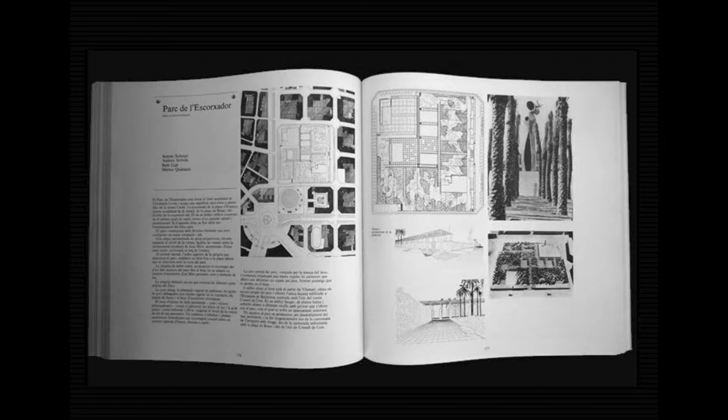And these little plazas were done with few money, and with this strategy, which I think is the most emotional moment that we lived in this urban transformation.

Some of them were simply just opening, taking cars out, opening spaces in front of some monument. Some others were more complicated because it was this both thing at the same time: to rediscover our central old city, and at the same time to connect with the new cities that didn't have any public spaces, and then they were transformed to allow people to gather around.

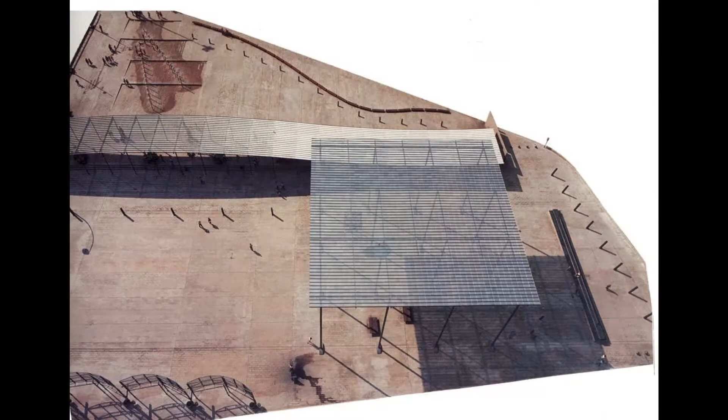Or other more famous spaces that nobody has really used in a proper way, but still there were attempts, very risky attempts, to kind of discover new ways to gather in the public spaces. Or parks, in the places where there were quarries and they didn't exist.

And all these different little strategies became a little bit bigger in a new strategy when we had the Olympic Games. In '86, we decided to, not just by doing little plazas, but taking 4 big spaces that were the 4 areas of the Olympic Games, and then connect them all with a ring road that went all around.

These 4 areas kind of were the excuse: one, to open the city to the sea, another one opened the city to the mountain of Montjuic, and the other 2 opened the city to the mountain of Collserola.

4 dots, very well placed for the Olympic Games, not really for the Olympic Games, because we didn't really care about these 15 days of people jumping, but they were very important to take those 4 areas and to create a whole strategy for the city to transform it as a whole.

The Olympic Village, the Olympic Ring, and the ring road around that connect all those Olympic areas, which mostly went through those areas that were forgotten during the Franco dictatorship, and was an excuse also to connect them all.

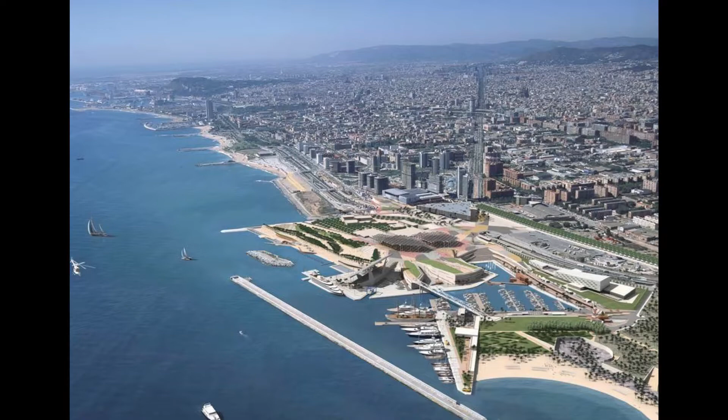You see the amazing transformation that the Forum of Culture brought to the city, but you don't see what we had to do to pay for it. Here it's quite easy to see: you see the public transformation, but at the same time you see a new kind of city created by Hines, an American investor who bought most of the land in front of the sea and created this new town with a shopping mall and houses that had nothing to do with the model of city transformation we'd lived with in the years before.

So you see the logo of the forum, those two hands. It seemed to me those two hands were the private and the public shaking hands, but in fact it was, I would say, a terrible situation, which you can see very easily with those two triangular buildings.

One is public, built by Herzog and de Meuron, supposedly one of the best architects in the world, and supposed to be one of the best buildings in the city. At the same time, another triangular building right in front of it was one of the worst buildings in the world, done by Stern—a terrible shopping mall without windows, without connection to the city, connected by cars, with a highway leading directly to parking spaces, and next to a neighborhood that's almost a gated community with towers built as if it were Singapore, where Hines had built many developments. It's an amazing transformation you can also see in the city's skyline.

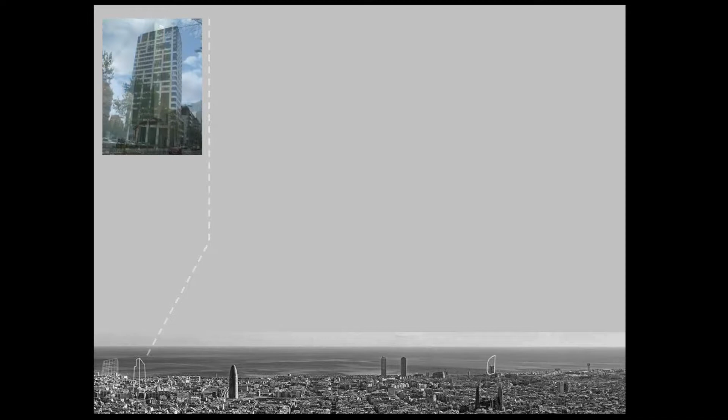It's a skyline, most of it related to the coming of those investments and star architects to our city, and we allowed them to build exceptions in our city. For instance, we see this building by Jean Nouvel, which is quite famous. He came to our city and landed, allowing them to build an urban exception. But it's not only him, it's also Ricardo Bofill, Dominique Perrault, Álvaro Siza, Fuksas, Norman Foster. I would say we have one of the cities with the most star architects landing with those big companies in our city.

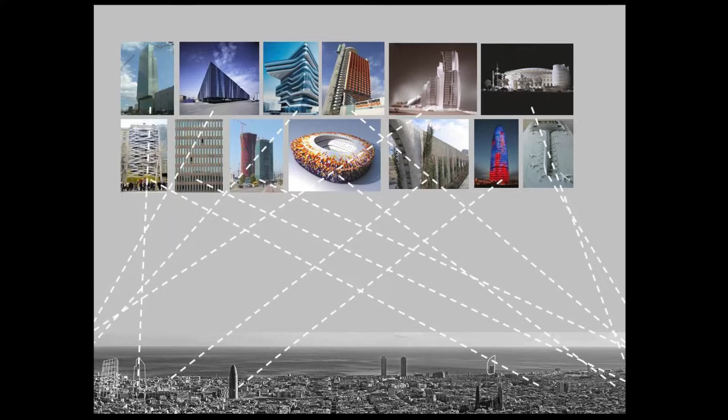It's really a crazy situation, you can feel that our city had somehow been sold. And as you know, they all know that we have Gaudí as one of our most important items to show around the world.

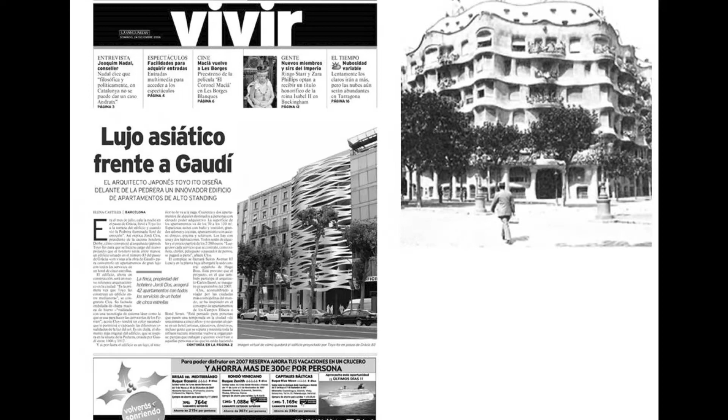They come, like Toyo Ito for instance, thinking that we are kind of stupid, and they create buildings with an excuse of Gaudí. He was saying that this building, which is in front of La Pedrera, is the La Pedrera of the 21st century, but in fact it's a project where he only designed the facade. So again, these masks—we are creating masks in our city, creating this stage for people to come and visit and be enlightened by our architecture, which in fact I would say is not architecture; it's only the dress of an architect.

Or Norman Foster, who came to the project of the new stadium of Football Club Barcelona, and said it was inspired by the dragon of Parc Güell. Or of course Jean Nouvel, who said he was building the tower that is now finishing at the Sagrada Familia, inspired by that.

But an even worse example is Ricardo Bofill, who was imitating a building which has nothing to do with our culture, and of course building in a place which is forbidden—in front of a very popular, magnificent neighborhood, La Barceloneta, that is being gentrified very, very quickly.

So as I was saying, here's Sheldon Adelson, who builds those casinos in Singapore. He wanted to buy part of Barcelona to create a big casino with prostitutes and drug dealers, and fortunately we changed the government and stopped it. But it was about to be built in our city.

So I was saying that we loved the way we started, opening Barcelona to the world and saying hello, but at the same time many people in the city started recognizing that this way of becoming a global city had also its counterpart.

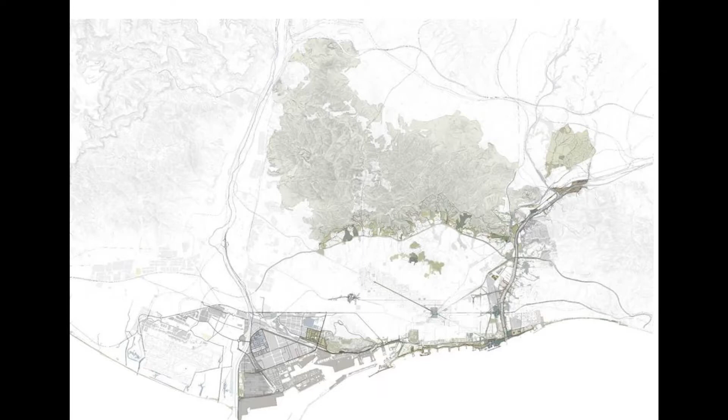The ring road territory is a project that deals with four big projects. One is to rethink our relation with the sea. We built up our beaches because we didn't have beaches. Almost all our seafront is artificial, and that's something we have to rethink about.

Would we do it again the same way, putting sand and fighting against the sea? Probably not. So now it's a great opportunity to rethink a new way the city relates with the sea.

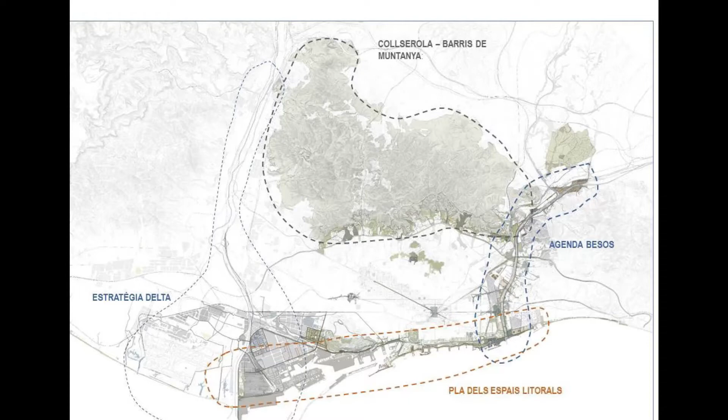Also the new way the city relates with the two rivers we have around. This is Besòs, where most of the poverty of the whole country is concentrated, so it's a great opportunity to do a social project around the river. In the River Llobregat we have a concentration of enormous economic forces, like the airport, the port, the industrial area. So it's a very important project with the axis of the economy.

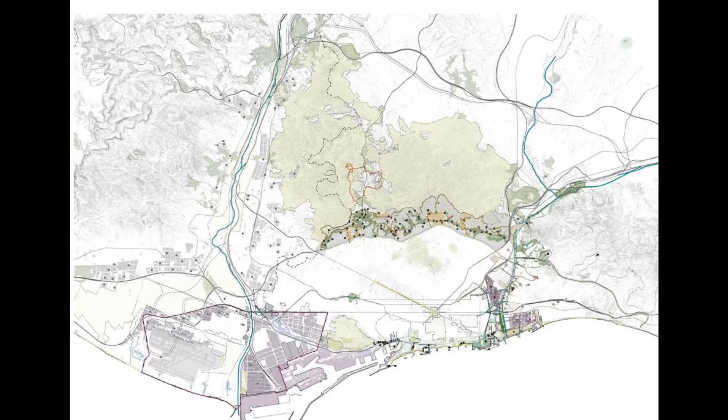And also we have the mountain, the central park of the region, which is also a very important project belonging to environment. So we have the social, the economic, the environmental project, and here in the sea, the most identity-based project, one that has a little bit of everything.

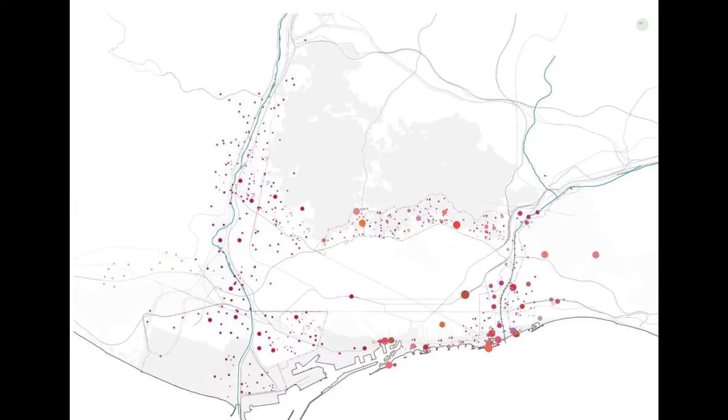These four projects contain like 600 little projects all around, and I'm going to try to explain just some of them very quickly.

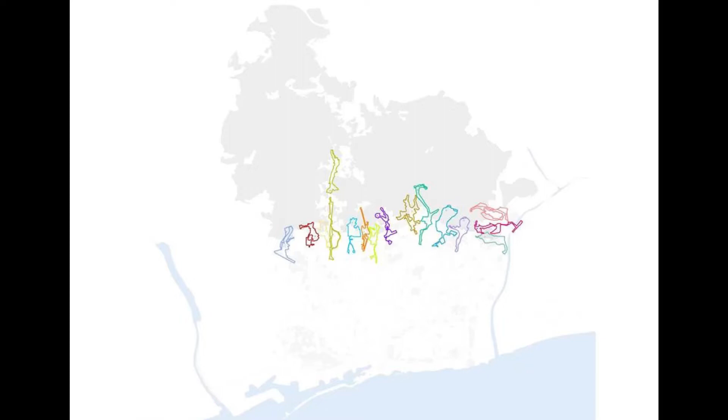One of the big projects we worked on before this government was the possibility to connect with doors—we say doors, but with the mountain. Our idea is not only to connect with the mountain, but also with the sea, creating these green-blue corridors that cross the whole city, a great opportunity to connect those two ecologies.

That's something already being done, connecting the mountain with the sea. But mainly with the project of the seafront, we realize the distance, the density is very short, and it's important to realize that Barcelonians are a strange kind of animal that belongs at the same time to the mountain and to the sea.

Even our gastronomic culture is mar y montaña, sea and mountain, which you find in our dishes. So it's about realizing we belong to both ecologies, and creating those corridors that connect economically, socially, and culturally the whole city.

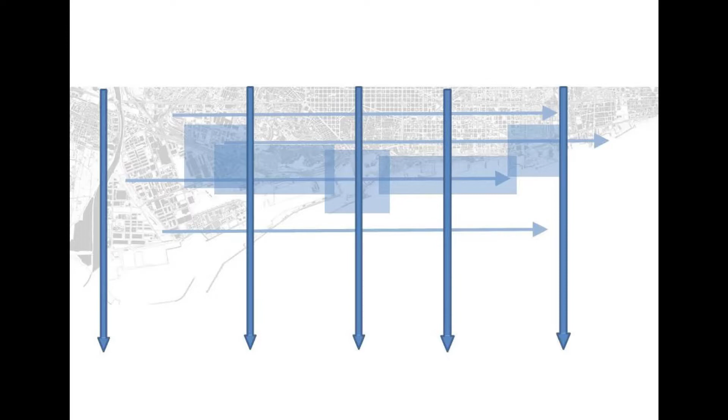But mainly when we hit the seafront, instead of thinking of the seafront the way it's always been thought—creating an urban strategy only related to itself—we want to change it and use it transversely, and create doors to the sea as well.

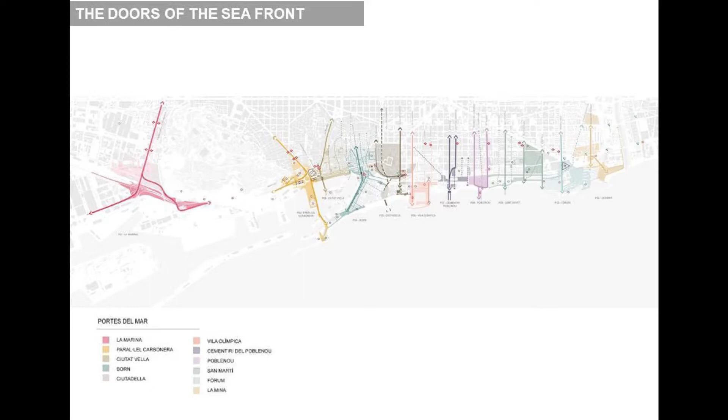We want to connect and really ask the project of the seafront what can be strongly related with the needs of the people behind it. We are not doing beaches for tourism. We are doing beaches for the neighborhoods that are behind.

So the important project we are now dealing with is how to connect very strongly and easily with the neighborhoods that are behind.

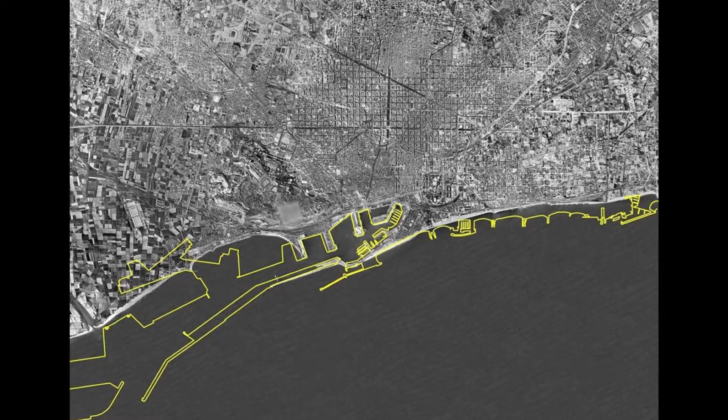And also, how do we deal with the sea? This is the seafront in the 50s, and this is the seafront now. As you see, we invented our seafront, and this is something we cannot do anymore. It's so stupid—every year a storm comes and takes all the sand out of our beaches. Now, with the new strategy of resilience, we have to work with nature instead of against nature. So this is the other big thing about the project.

And mainly one of the main issues is talking about those dimensions of maritimity. Barcelona has done many things on the seafront during the last years, but few of them are really related with the sea.

We are putting shopping malls, five-star hotels, casinos, bars and restaurants, but we are not really talking about the blue economy and the cultural, spatial, social, and economic forces that the sea has to really inform the city as a whole.

So we really have maritimity, but just formally. We have a shrimp on top of a pergola, a fish on top of a casino, a five-star hotel shaped like a sail, a boat which is a restaurant, and waves which are a shopping mall. But none of them are related to the sea.

So we have to change this culture, not only formally, not only doing forms that relate to the sea, but content—really content related with it.

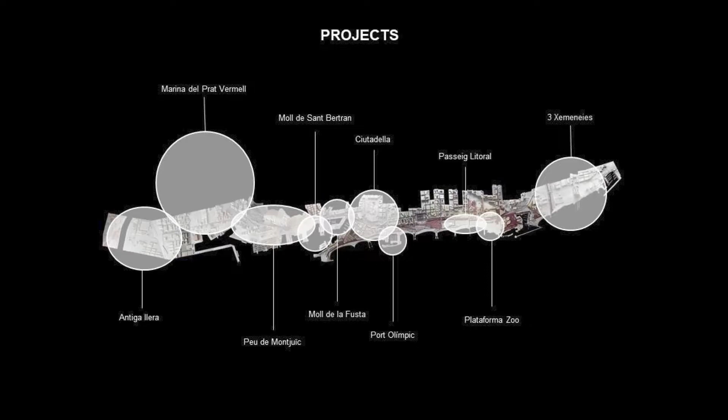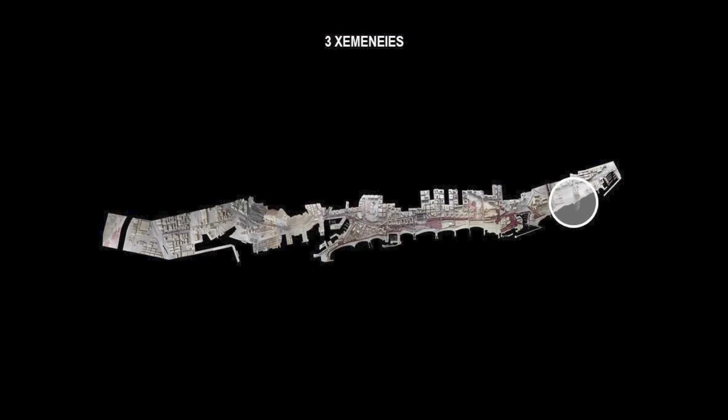One is these 2 kilometers in the seafront that we have to think about—if we want beaches, if we want a malecon, a neighborhood, or a shopping mall. So we have this amazing opportunity of these 2 kilometers, but also this factory, this power plant that has been empty, and now we are thinking which kind of programs we could give it.

But at the same time, something very important is that we have a river here, and the mouth of the river is canalized now, like if it was a sewage. So it's a great opportunity now for us to open up the river and create this new landscape.

Here we have Joanna, a part of our team and the director of the team that has been dealing with all these landscape projects. She's Greek, but she lives in Barcelona and works in Barcelona Regional. She could explain it much better than I will.

But definitely, one great opportunity is to redefine this line, this coastline, with this great opportunity of a new area and a new mouth of a river.

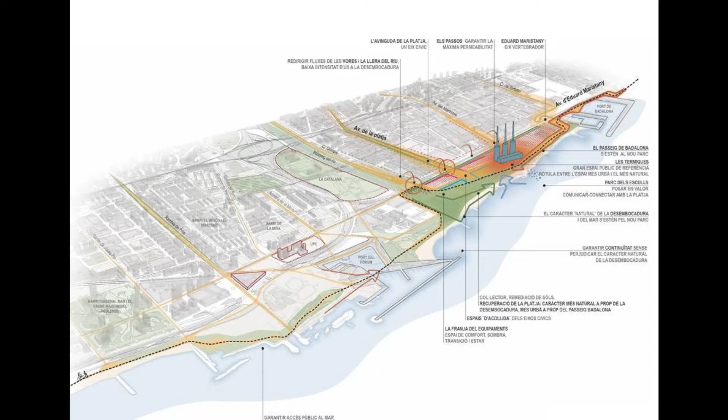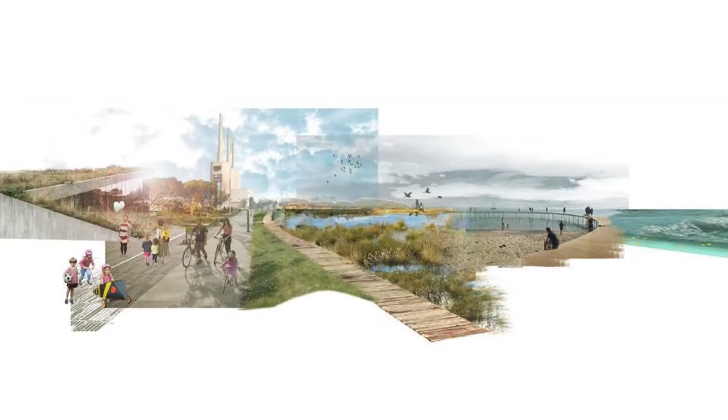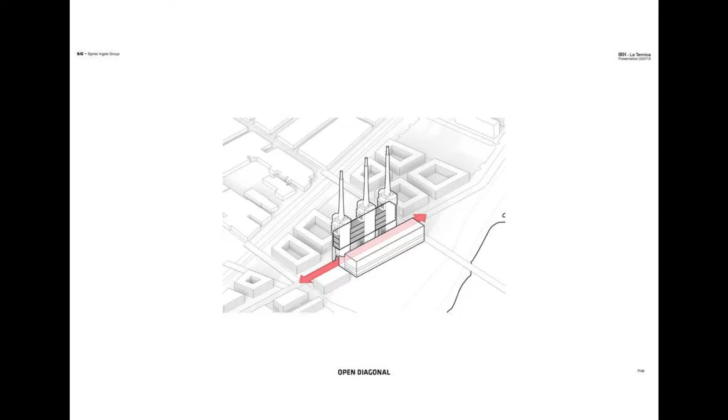As I say, creating also not only new landscapes for the city and for the river, but also to defend or deal with the great struggles we have with storms and water that definitely will rise—not only because sea level will rise 1.5 meters in 50 years, but also because of storms that we calculate will be more than 5 or 6 meters and will affect all these areas. So we have to laminate the water that hits the ground.

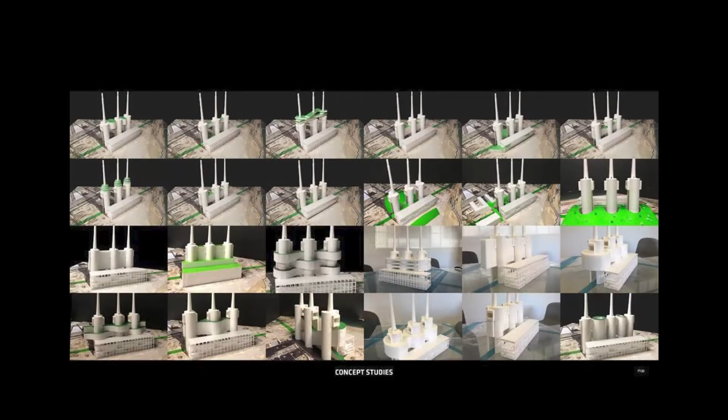Also, to think about what we can do with this building. I'm not going to go very far into it, but it's a very emotional project that we are dealing with now, and we're doing many proofs and things, also with a neighborhood that can grow behind it.

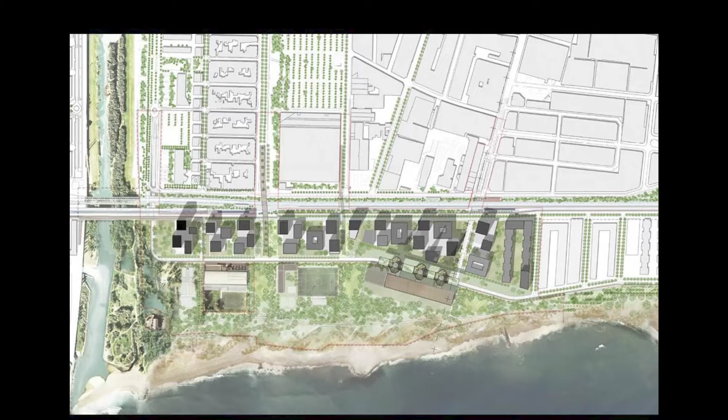It's a neighborhood that we don't want to be only for investment, like it was done before. It's social housing—50% social housing and 50% productive area. So at the same time, we're creating new typologies related also with the tissues and the industrial areas behind, and at the same time, of course, creating this new ecology related with the river mouth.

This is a project that Joanna has been drawing over the last year. It's also an amazing moment to keep working and giving continuity to the seafront in terms of public spaces, but not only dealing with this new opportunity and possibility to deal with the sea, but also to connect with those doors that we were talking about before, with the city that is behind.

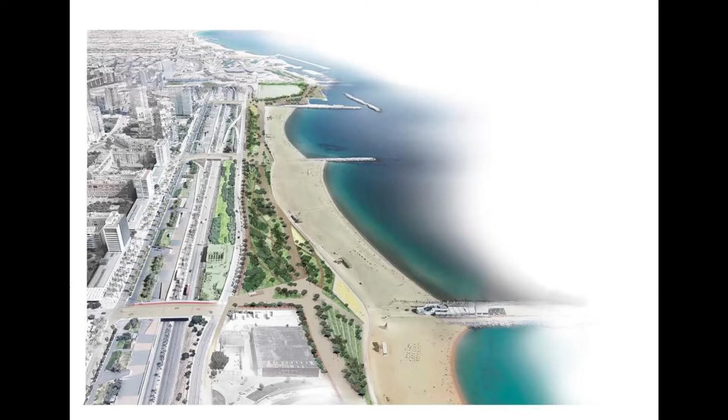Amazingly, we still have something incredible—a parking lot in front of the sea. We want to go from a parking to a park, but a park that creates a new relation also with the beach.

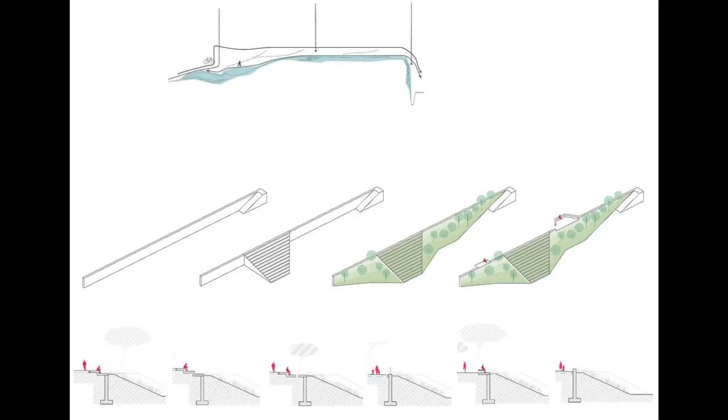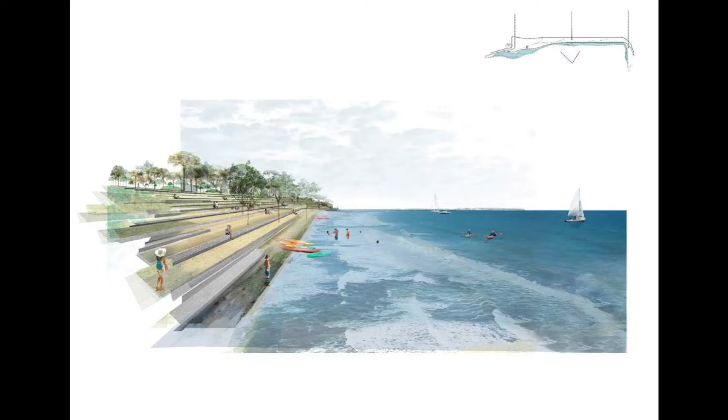Before we used to have this. Now we are dealing with another topography, a topography that needs to be sure and believe that someday maybe the sea will take over the sand, and we will still have some interesting place to deal with. I think this is a new design of beach, which is not a beach of sand—it's another kind of relation with the sea, because we are sure we won't have enough money to keep putting more and more sand there every year.

Another very important project is the Olympic port.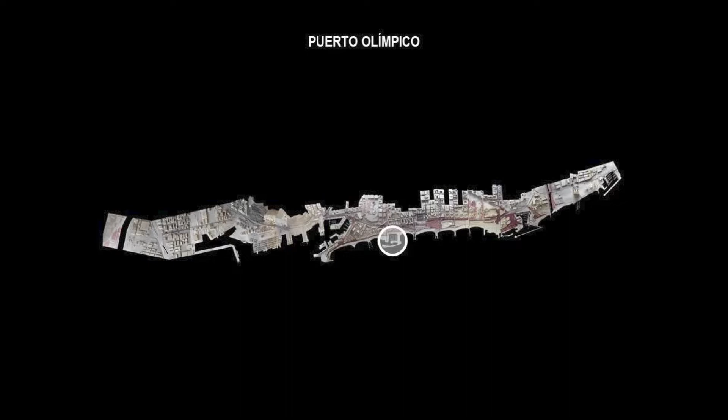We designed a nice new port for the Olympic Games, but the day after, we sold it all to nightclubs and bars, and it became one of the centers of drug dealing and prostitution in Barcelona. Every year, people died. It was a very, very dangerous place to be.

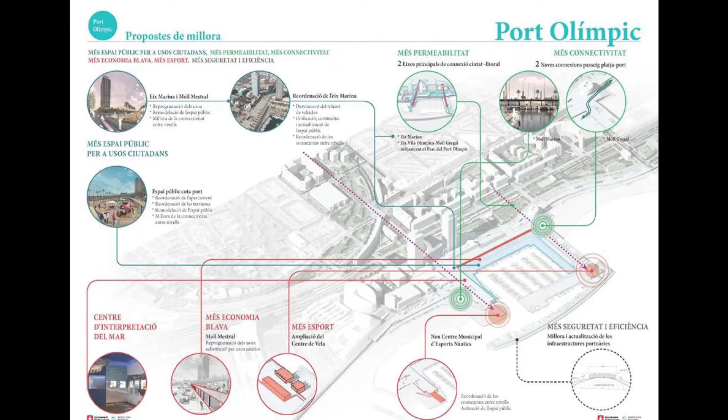Now we are taking out all those bars and creating this blue economy with other programs, also related with the neighborhoods behind, like the School of Sailing that was already here. We're enlarging those programs to allow the citizenship to gather there, even those doors that are now parking spaces. You can see the port, which is in fact a parking space, and we're opening it up to allow the city to go there.

Another project, which Joanna just presented two days ago to the port, and we are very happy because our strategy seems like it's going to be successful. We're convincing them that during the 80s, we said we opened the city to the sea with this project by Manuel Sola Morales, an interesting project that was very published and famous at that point, part of the model of Barcelona—but in fact, this is what he did.

We still have this enormous frontier with cars, which is the highway, the ring road we were talking about before, and we cannot really easily get to the sea. We are now changing the project.

With those doors—this is La Rambla, this is Via Laietana—we are opening it now, and also creating a new door in the middle to allow this dense and packed Gothic neighborhood to have its own park in front of the city.

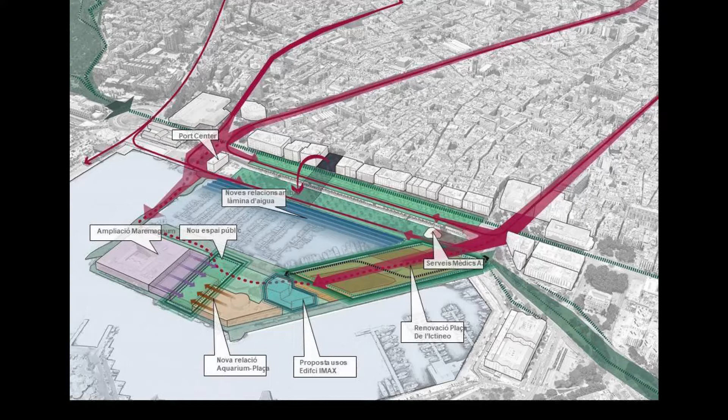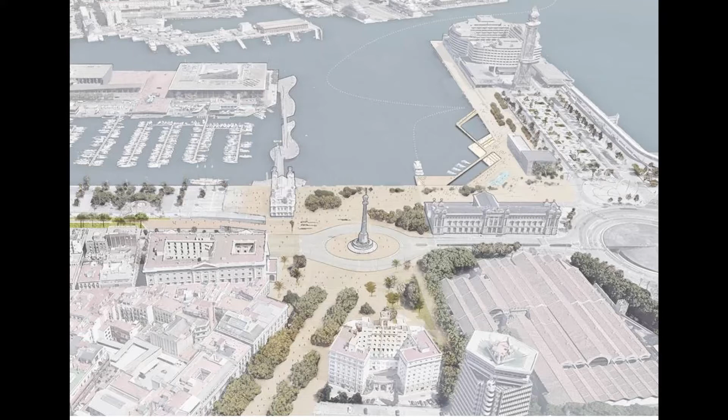These are some fresh images—not even the mayor has seen them yet—but we can see a bit how this can be developed: La Rambla getting to the sea and creating new infrastructures that allow people to gather around.

Or this central plaza, which is blocked by the highway—opening it up, crossing it, and allowing people to really touch the water.

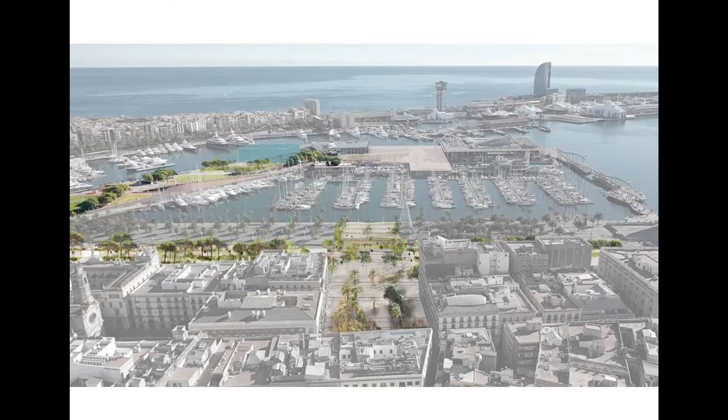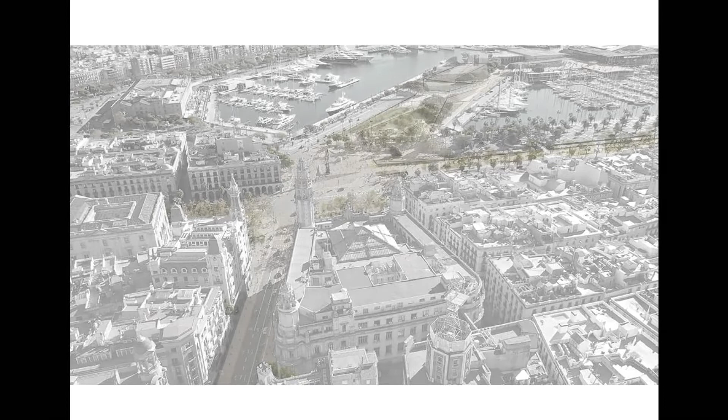Or in Via Laietana, this is the other door, which now it's quite impossible to cross with the cars to really get to the sea. We want to open it up cleanly and create a new social program related with the Opera House that will be placed here, as a great excuse to connect with the city.

Well, those are all those projects. The last one I'm going to explain is the idea to not only think about those doors that hit the sea, but also how the sea will hit the city.

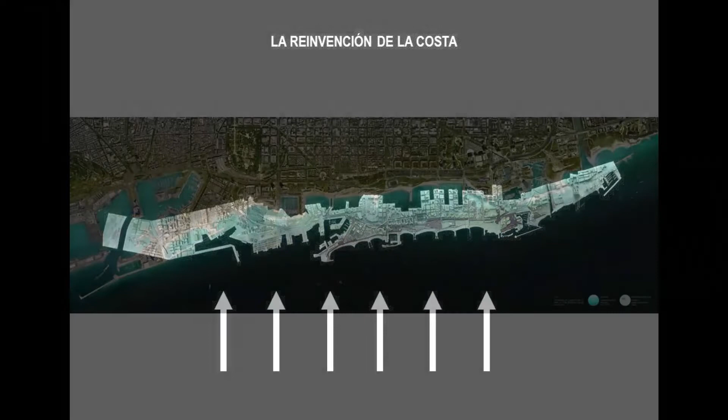This image is not a project itself, it's just a projection of what could happen. We imagine that one day we will start losing our beaches, and maybe there will be one beach, the original one, Barceloneta, that we will save. But the rest of the beaches, maybe we will lose them, and then we will have to create new strategies, like the one we were explaining before, to relate with the sea.

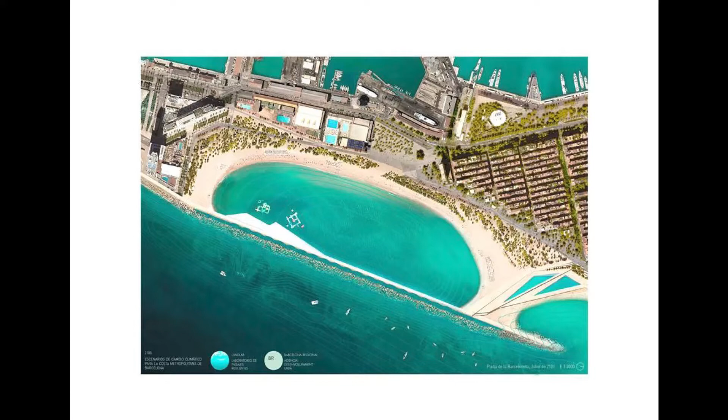But maybe one of them we will be able to save, because it's the historical beach of La Barceloneta. And by doing it, we could also create a new opportunity for this beach to survive with new programs.

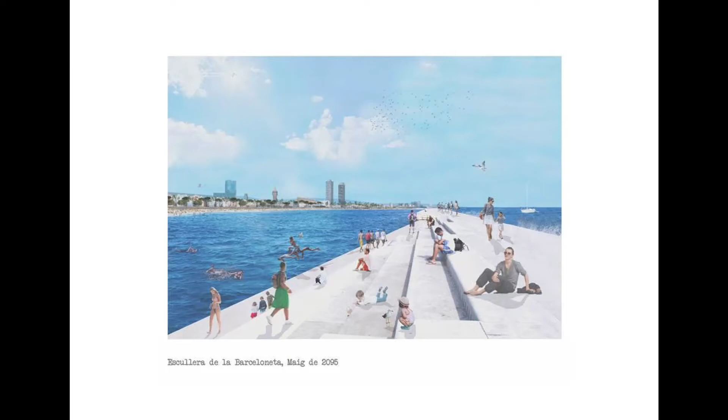The project is in a book and in exhibition, and we are going further with, I think, more than 20 projects all around the seafront. Some of them are already being transformed, and some others maybe we won't see until, I don't know, 10 or 15 years from now. But there's another project I was telling you about.

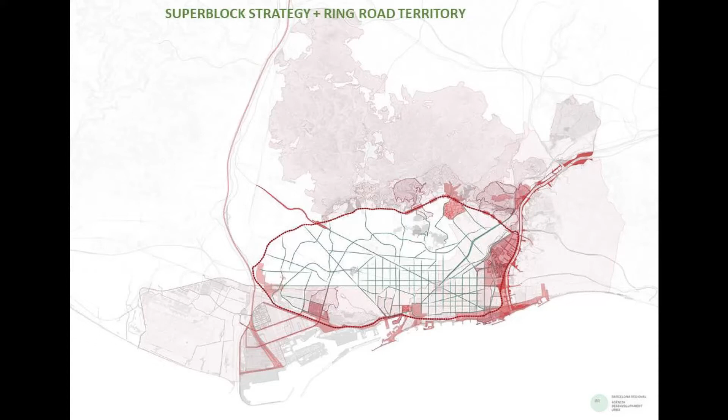This one is already being done, and we're very excited because it's a very simple but radical project of transformation and recycling the interior area of the ring road. This is the Superblock project—I don't know if you know about it. I know some of you already do, and we've been talking about it, but I'll go quite fast because it's easy to understand.

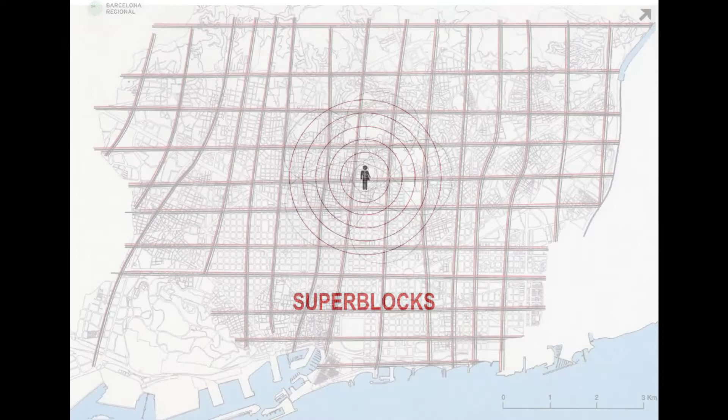The idea is to recycle the grid by putting another grid on top with basic roads that allow only cars to go through those basic roads, and the rest are free for the people.

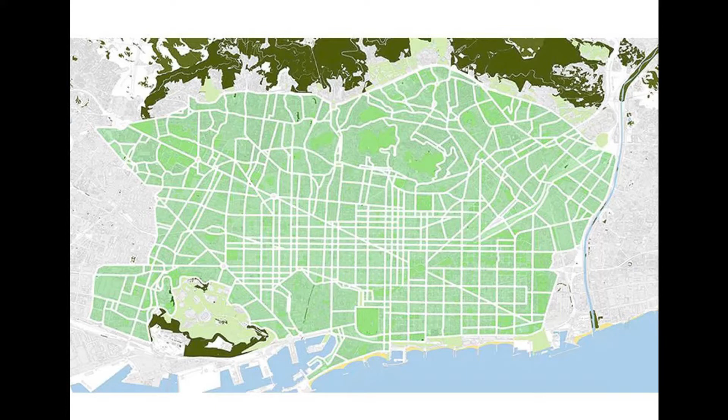So that's the main thing of the project. And it is the real scheme we are working on. Those are the real roads that you could use, and the rest are becoming the parks that we don't have, the plazas that we don't have, because it's a very dense city. So it's a very easy way, without demolishing any building, to recover all these spaces. This is the scheme.

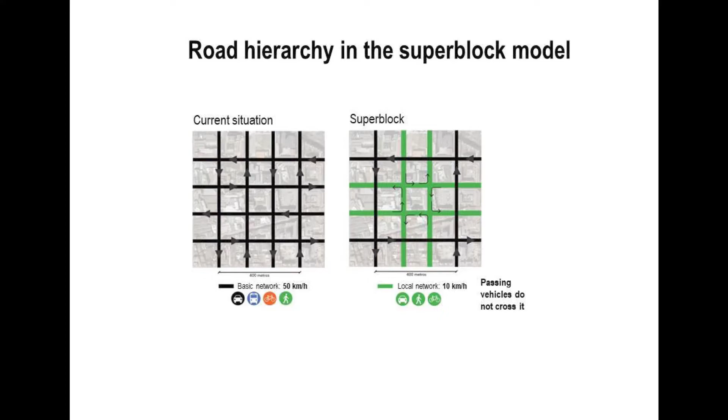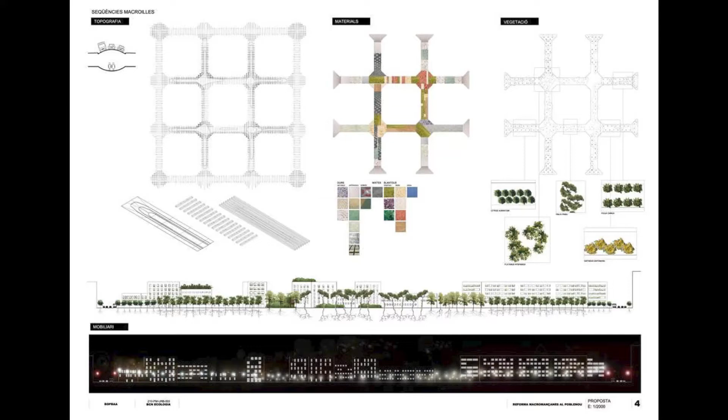We have like 3 times 3, and then we allow only cars to go in the perimeter, and those streets are free from cars. What can happen when you do this? One thing is maybe you can change the topography. You have this section in the normal streets. Maybe we could think about this section, or maybe we could think about permeability, something very important.

Our cities don't allow water to go, so this is allowing us to gain water for the cycle, for the cycle of water. We can also change the kind of greenery we use. Here trees are dense to stop the smoke and the sound of cars, but maybe we can free from that. Those are aligned one next to the other, and maybe those can freely be put in the center of the street.

Also with the light, it can happen the opposite. Lights are here because of the cars, and maybe when you go inside of the superblock, the lights can have a human scale. That could be another situation.

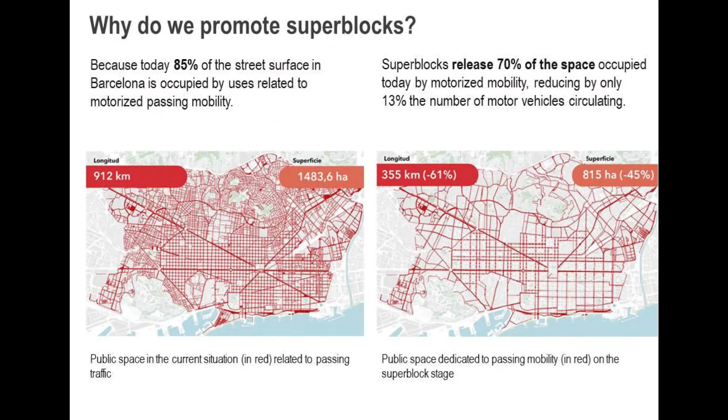But why do we promote this? Basically because we release more than 70% of the space. It's a social injustice that not even 50% of the people have a car in Barcelona, and we are giving them 85% of our space. So it's completely unequal and unjust. So we have to kind of go back to this equality.

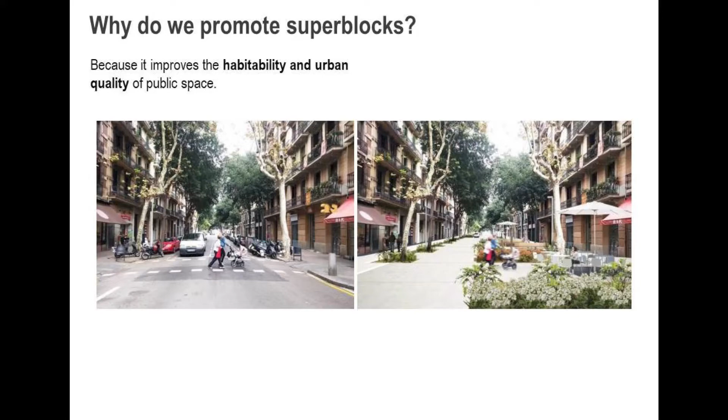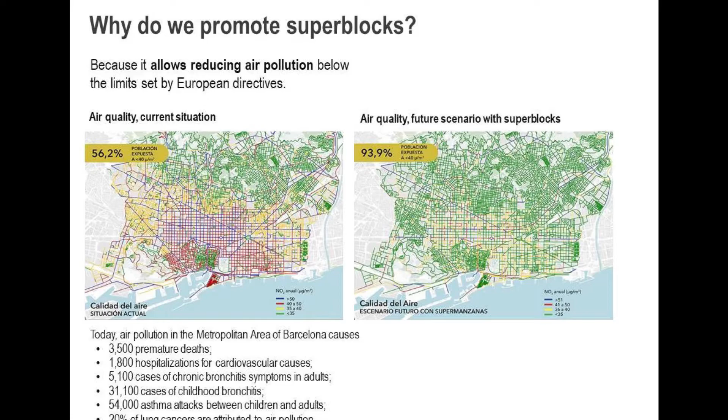Also because we promote them for the quality of public space and the habitability of urban quality, and because they easily and fast reduce air pollution. As I said before, Barcelona is one of the worst places in Europe to breathe. So it's urgent that we deal with this shift of changing. We have 3,500 premature deaths in the city because of polluted air, and it's urgent to deal with it.

But the project of superblocks didn't start because of the air. It started because of the noise, because the noise levels are so high that they are creating disease, mental disease and stress and many other problems affecting the quality of habitability, which it's urgent to deal with.

Also, of course, we can radically reduce the heat island effect. Now we have those areas with cars, with no permeable soil, without enough greenery. The opportunity to create those new landscapes, of course, reduces this effect. And of course, we connect greens.

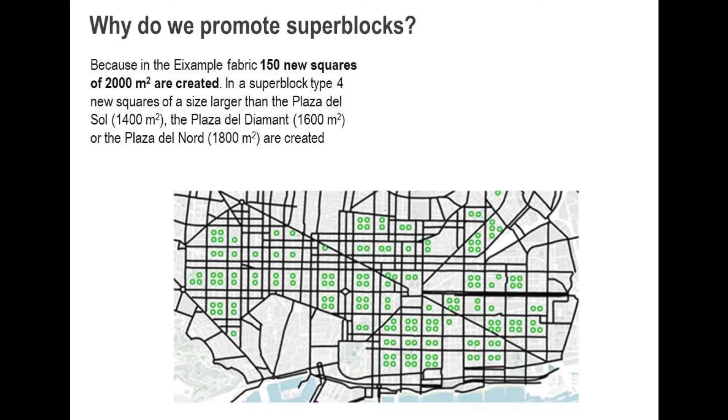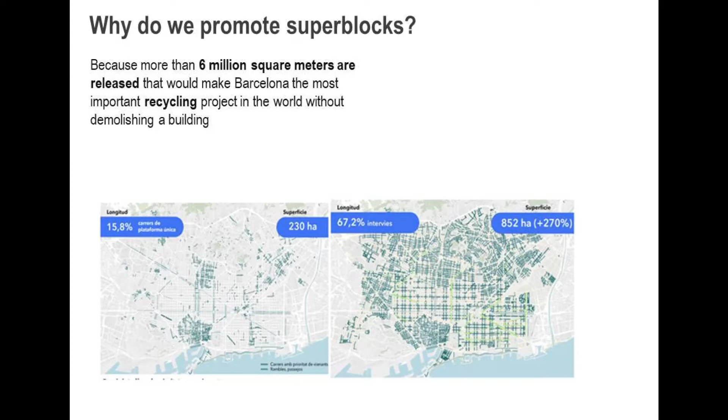One of the most encouraging things is that by doing this, we can release 150 new squares. The crossing pattern of Barcelona, as you know, is very special because it has those corners that are cut, more than 2,000 square meters of plaza per crossing that, if you take cars out, can easily be recovered. So, as I said before, it's a 6 million square meter recycling project without demolishing any building, just by not allowing cars to go through.

And all those spaces, we wanted them because there is pressure from the citizenship that needs to do things instead of only walking and crossing, which is what our streets have become — instead, staying. So the idea of staying in the street is a very important matter for all those organizations that are claiming those square meters.

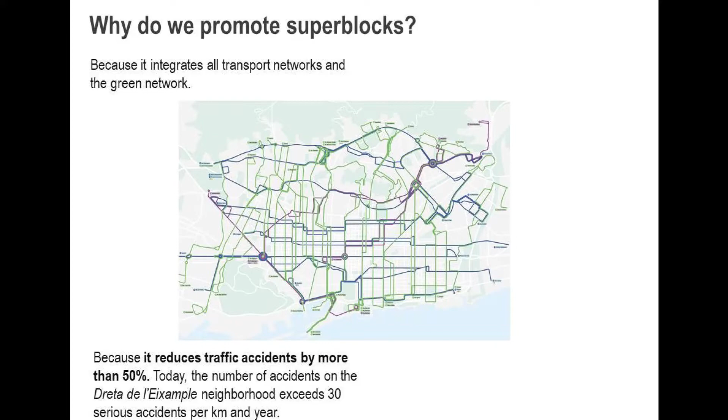And of course, to do so, the first thing we had to do, which we finished 5 years ago, is to create the network of superficial public transportation, fixing those basic streets. So the first thing we did is change all the buses, creating this rectangular structure of buses that go horizontal and vertical, like in Manhattan. So we kind of took the model of Manhattan and made them go through those basic streets. So that was the first thing.

And the second thing, mainly because now many people are using the neighborhood to cross with their cars — more than 350,000 cars are crossing the city through this neighborhood.

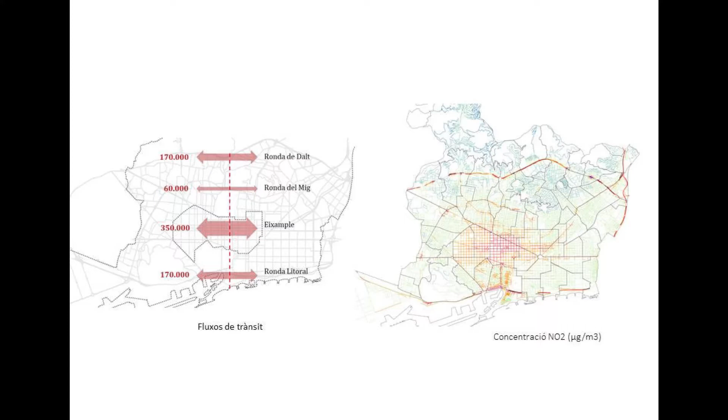So it's about pushing them out, because we need people who go with their cars to that neighborhood, but we don't need people using that neighborhood just to cross through it, since there are other highways around for that. So it's kind of easy to use this new network in a proper way.

After doing the bus network, the next thing was working with students. We gathered students from 5 different schools of architecture in Barcelona, and we wanted to prove it ourselves for a weekend. We made the pilot superblock during the festivity of one neighborhood, went there with paint and plastic bags, covered the traffic lights, and created it for a weekend as a tactical project - the first superblock.

It was done without money, only with more than 400 students from all the different schools, and we created a year's worth of projects on how we could transform superblocks, while at the same time creating the first one tactically in the neighborhood of Sant Martí.

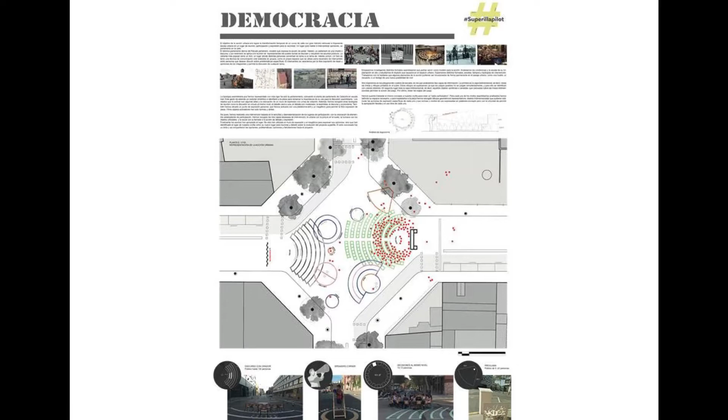There we stopped the cars in the whole superblock and created a parliament. We drew on the floor the Parliament of Catalonia, and gathered in this area with Salvador Rueda, the inventor of the idea of the superblocks.

This is our politician, Janet Sanz, my boss. This is the architect, the professor. This is Iñaki Vaquero, my former partner. And here are the students, the neighborhoods, the technicians. That day, people started knowing what a superblock is.

We started discussing. Here you see Salvador Rueda very angry at 4 o'clock in the afternoon, discussing with the neighborhoods, and here he is very tired. At 1am, we were still there, keep discussing with the people of the neighborhood.

Of course, the next day, the idea of the superblock, which nobody knew what it was, started to become known. That's why tactical projects are so important - they're meant to prove things and also to communicate things. The next day, in taxi cabs, in bars, in all the newspapers, on television, the idea of the superblock started to become a reality with this first example.

Of course, the next day there were people against it, people pro, and we spent a year discussing, changing the project, and also thinking about what to do with this - when you take cars out, what can you do? This was one of the installations we did with the students, asking what can happen here in these empty spaces for the citizenship.

After a year, talking with the neighborhoods, and the neighborhoods creating new programs, it started to become a reality - not so tactical anymore, more strategic. So the other day, with the students, we calculated and went there to see how many new users are in those spaces, and it's amazing.

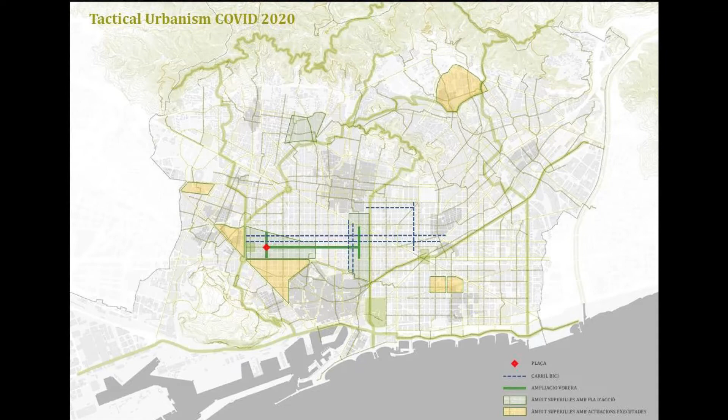We used that—and maybe this sounds a little strange—to create superblocks by taking lanes from cars and making bigger sidewalks. Because of the pandemic, we couldn't walk on small sidewalks, so it was a great excuse to enlarge sidewalks on some streets. But the streets we chose were the streets already thought to be part of transforming the superblock theory. So we used the pandemic as a tactical way to go further with that strategy.

So we had streets like this, where we took one lane, allowing the sidewalk to be bigger so people wouldn't be touching one another, and many others, and of course bike lanes. We created 200 kilometers of bike lanes using this great opportunity.

One of the most beautiful projects we did is in front of every school—now I think 200 schools are protecting kids. It's named 'Protecting Schools,' the project that takes lanes away from cars in front of schools. When kids come out of school, they don't cross paths with cars, and they don't breathe car exhaust.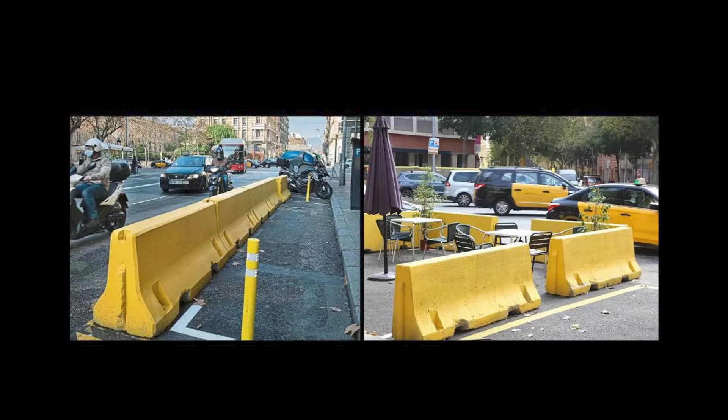That was a very important tactical moment. Even so, many people started saying that we are doing things that are very ugly. I don't know, I don't think this is ugly. It's tactical, of course, and we used these elements to also enlarge the terraces of the bars, taking lanes away from cars.

During these years, many people, even the architectural intelligentsia, have said that we are doing things very ugly, that Barcelona is a very beautiful city—as I said, 'Barcelona posa't guapa,' make yourself pretty. Barcelona is a pretty, bourgeois city, and all these ugly things we do are not very Barcelonian.

But as I said, we were dealing with something very urgent, which involved those layers—the first one being taking advantage of that moment to really create better air quality.

So the next step was to create a competition. I don't know if the video goes on—well, if not, it's a competition that expresses a bit of the next step.

The next step is to create axes that connect superblocks. Instead of doing it by islands, as we did in the pilots—taking three blocks and creating pilot projects—instead of doing this, what we decided is to build new streets that connect them.

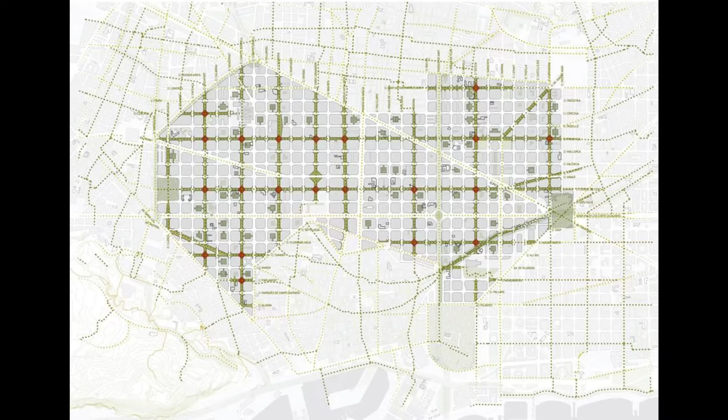We started with 4 plazas and 4 streets, and now we are going to 21 plazas and 21 streets. The idea is to change the old street design of Cerdà, the engineer who designed the city of Barcelona.

That was his scheme—very intelligent: 10 meters of road, 5 and 5 of sidewalks, and great trees all over. But the road of the 20th century, in fact, became this—not what Cerdà had envisioned. It became a city taken over by cars.

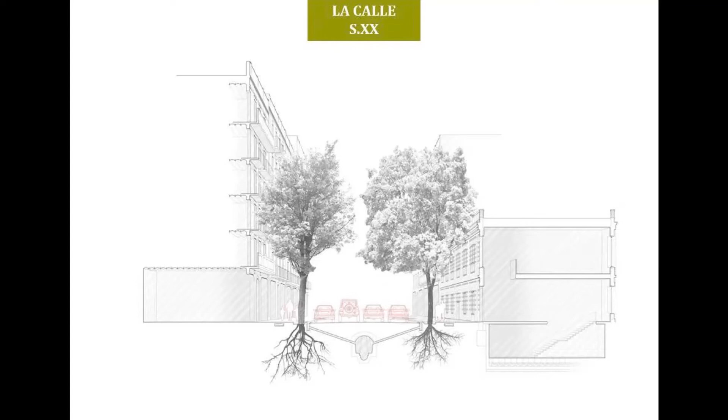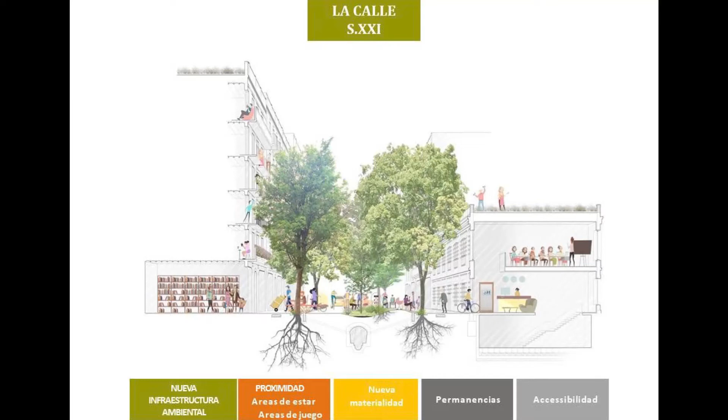The idea of the 21st century street is to recover, to reconquer—as at the beginning of the explanation's title—those areas, and also to connect accessibility with the programs on the ground floor, and the people who live there, whom we want to stay in our city instead of being kicked out because of gentrification. So it's a project not only about public space, but about housing, public space, health, and different things happening around these transformed areas.

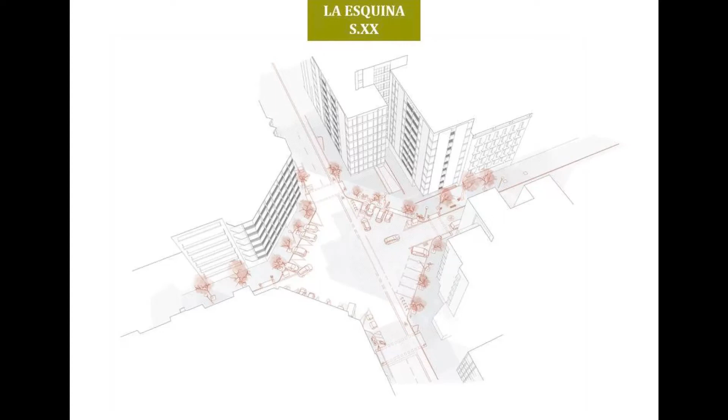And of course, the corner that is now crossed by people in their cars—what we want is to have those plazas, and the works are starting now.

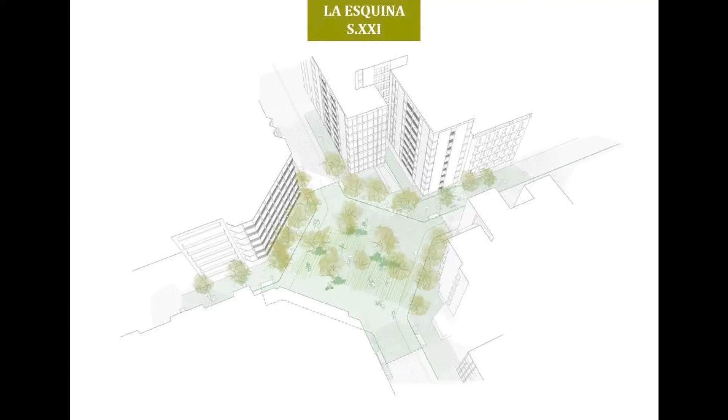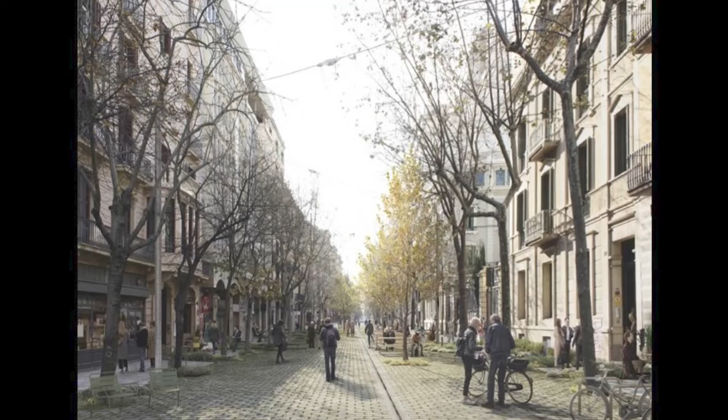And we will have, at the end of next year, the first 4 plazas and 4 streets being transformed. A street that, if you know Barcelona, most of Barcelona is like this, because we don't have many parks and plazas. The idea is to become like this, relating to the general strategy of putting people in the center of the street. Like the onion, where people is in the center. Instead of having cars in the street on the skin, we have people, and around the people we create this new transformation. So, thank you very much.

So, thanks a lot for this inspiring presentation. Way more than we expected. Way more ideas is always good.

And raising a lot of questions. I have prepared a lot of questions, but since I know we have drinks later on, I can ask my questions to you later. I want to first ask the people in the audience, do you have questions? Do you want to know more about one or the other projects? Or do you want to have dinner? No, we'll make 15 minutes of discussion.

No questions? Tassos, you have a question? I have a question. Will you speak up a little bit? You have to speak staccato in this space here. I'm trying.

Thank you very much for that, it's very inspiring, especially with these two scales. But you talked about one new priority the city has, which is the right to housing. How do the superblocks promote the right to housing? And a second question: you talked about necessary infrastructures, maybe densifying public transportation, but in these superblocks there were also parked cars, etc. We also see this problem in Athens, with cars being the main mobility or transportation means. How is Barcelona dealing with that?